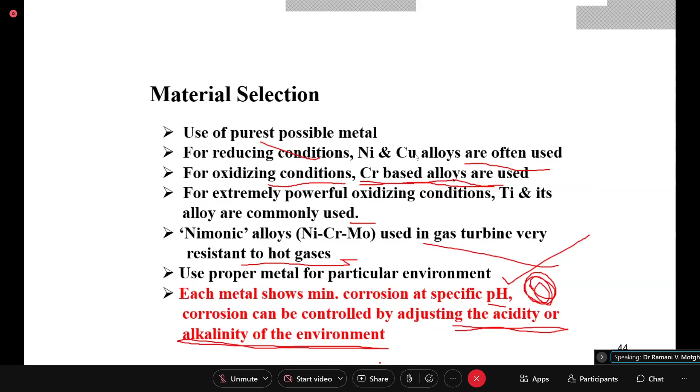Then there are protective coatings. Many coatings are there; one is metallic coating. You know that steel, it is galvanized - galvanization is coating of a zinc layer on the steel metal. Zinc is always a sacrificial material which sacrifices itself. Even if there is a scratch, the zinc part will undergo oxidation, and that is how galvanized sheets are protected from corrosion.

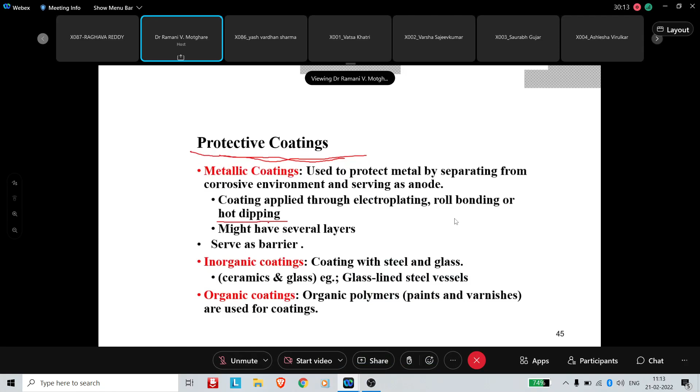Other types of metallic coatings are used to protect metal by separating it from the corrosive environment and serving as anode. Coating is applied through electroplating, roll bonding, or hot dipping. Roll bonding is like laminating, where the metal is placed between two thin sheets of sacrificial material - that is metal cladding. In hot dipping, certain metals which liquefy at a lower temperature are melted, and the metal to be protected is dipped into that hot melt, giving you metal hot dipping.

These coatings might have several layers or serve as barriers. So it may serve as a barrier, or it may have several layers, or it may work by sacrificing itself.

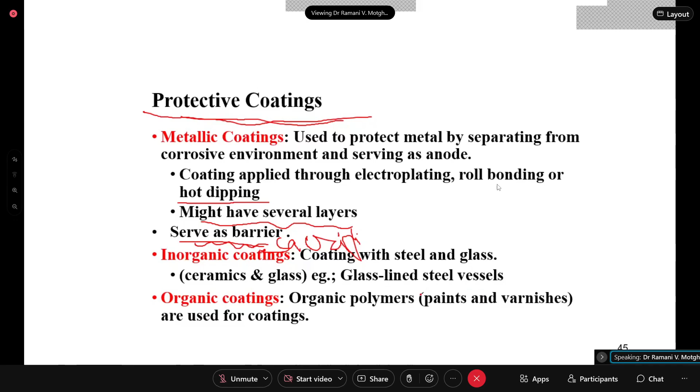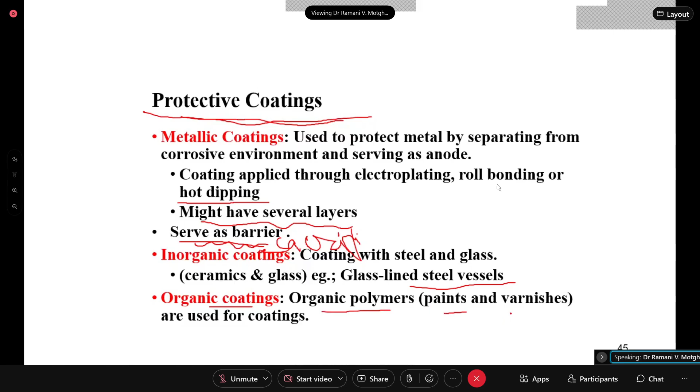So that is how one metal may protect another. Inorganic coatings are ceramic and glass, or glass-lined steel vessels, used in some applications. You can line it with glass and ceramic. Organic coatings are organic polymers like paints and varnishes that are generally used.

Then design, material and design selection. So material we saw. Now coming to design: weld rather than rivet containers to reduce crevice corrosion.

Now you see what is a rivet. When you have two metal plates placed over each other, a rivet is something having a kind of mouth and a smaller part. That part is put here and then hammered from the upper or lower end, so it goes in like this. That is termed as a rivet.

The rivet metal is generally different from the sheet metal, and that is why anodic and cathodic areas may form at the rivets. So instead of rivets, it's suggested that for two sheets you use weld material which fills this gap as well as the gap from the lower side, so the portion becomes gradual. The moment there are no such corners, accumulation of moisture and dust doesn't take place, and corrosion is stopped or reduced.

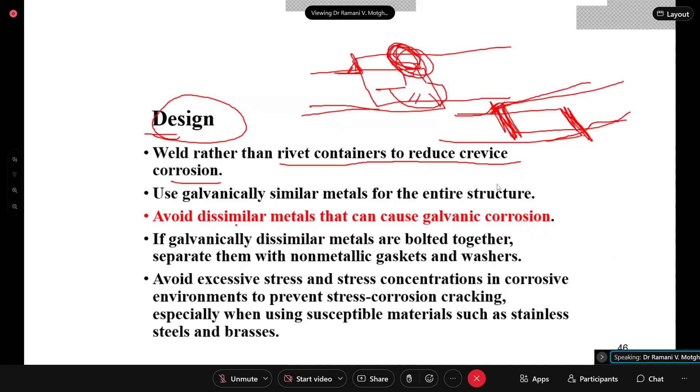So use a galvanically similar metal for the entire structure. A single metal, if used, is always better. Avoid dissimilar metals that can cause galvanic corrosion.

When galvanically dissimilar metals are bolted together, separate them with a non-metallic gasket or washer. So if you are nut-bolting with dissimilar metals, put a washer here. There is a nice diagram in SS Dara's book, you should definitely read that. If you put a washer, it will avoid contact between the two dissimilar metals.

Avoid excessive stress and stress concentration in corrosive environments to prevent stress corrosion cracking, especially when using susceptible materials such as stainless steel and brass.

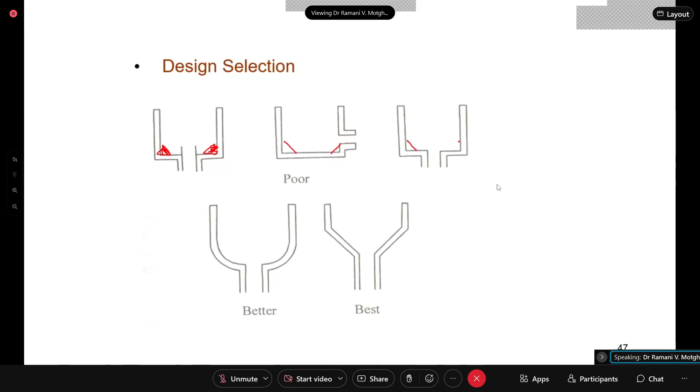So this is the design aspect. If you have such a structure, dust and moisture or water may accumulate at these corners. A structure without corners is always preferred, like this. So this should not be the case, which is why it is termed a poor structure.

Whereas here, if water falls, it will trickle down and not remain stagnant. This is termed a better structure, and this is termed the best one if held horizontal and vertical like this.

Then coming to different types of protection. The first one is design and material selection. The second one is protective coatings, the paints and all we saw, metal coatings and organic coatings. Then the third one is cathodic and anodic protection.

There are two types of cathodic protection. The first type is use of sacrificial anode, where you use a metal more active than the metal to be protected, and the other one is impressed current cathodic protection.

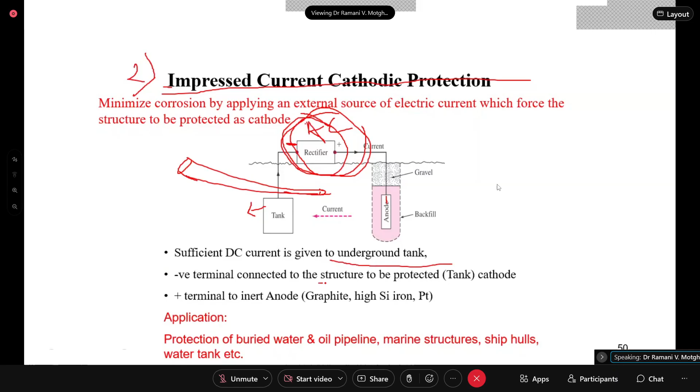So sufficient DC current is given to the underground tank, with the negative terminal connected to the structure to be protected and the positive terminal to an inert anode. The anode is generally inert, like platinum, high silicon iron, or graphite. The applications include protection of buried water and oil pipelines, marine structures, ship hulls, and water tanks.

So what is the difference between sacrificial anode cathodic protection and impressed current cathodic protection? In sacrificial anode cathodic protection, after a few years you have to replace the block of active metal, magnesium or zinc, because it dissolves into the soil. External power supply is not required here, whereas external power supply is required in impressed current protection. Periodic replacement of the sacrificial anode is needed, whereas in impressed current protection there is no replacement required.

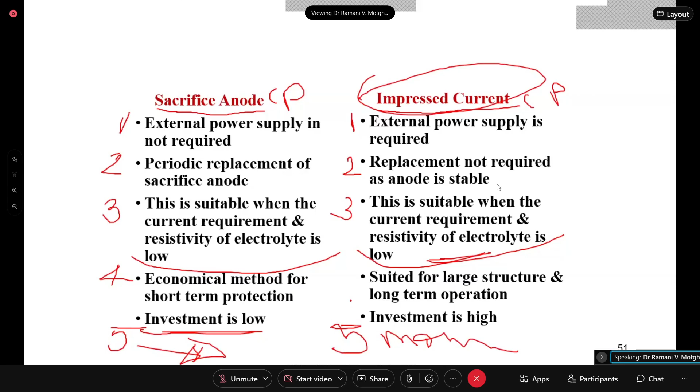Whereas with sacrificial anode protection, once you put it in place, you can forget about it for at least 5-10 years, and after that you simply replace the block of sacrificial metal. So these are some of the differences between the two methods.

Now coming to an important concept: anodic protection. What is anodic protection? You render a metal anodic and still it is protected. How is this possible? The structure to be protected is rendered anodic—you make it behave like an anode and still it is protected. Is it possible?

Sacrificial protection can be done - sacrificial anode cathodic protection we have already seen. We started with the first type, that is cathodic protection, in which we saw sacrificial anode and impressed current cathodic protection. So these are the cathodic protection part.

Now what we are doing? We are rendering the metal tank anodic and still it is protected. So the important part is oxidation will take place. So when you render any metal as anode, oxidation will take place. But the oxidation product forms such a coherent, non-porous film on the metal surface that the surface is protected thoroughly and there is no more corrosion, no matter sulfuric acid is kept there - this part is the oxide film formed.

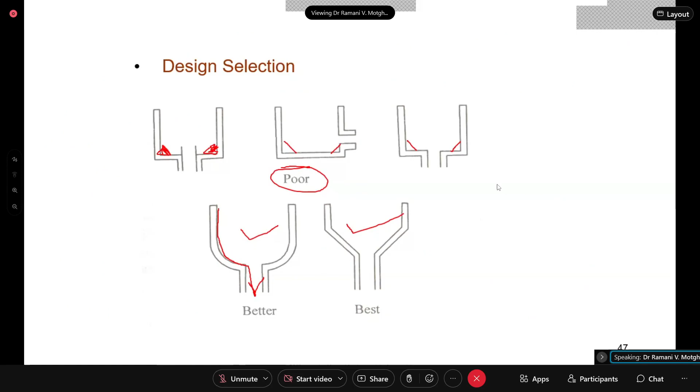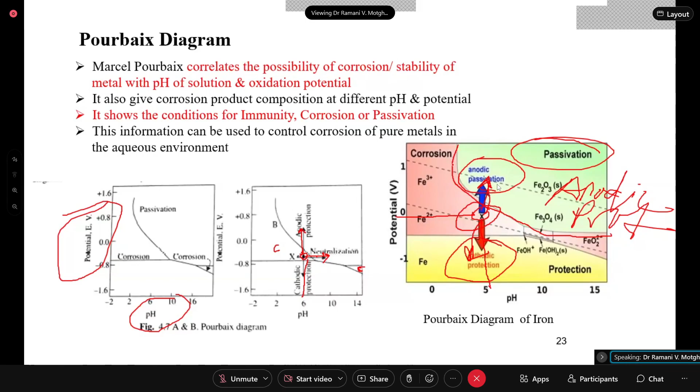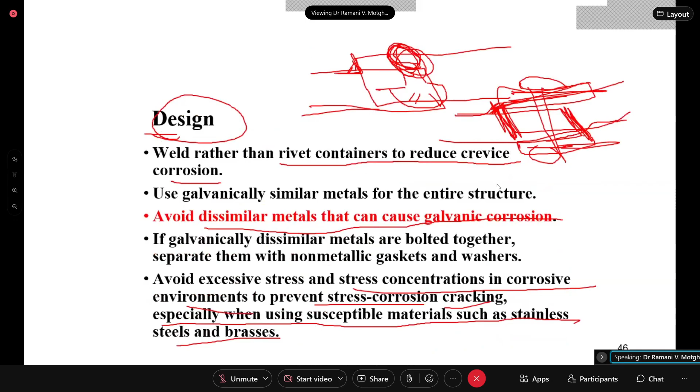So this iron system is studied intensively for such phenomena - what is the potential and effect of pH on iron, and how it shows corrosive behavior, at what potential corrosion takes place - and that concept is used in anodic protection.

So in anodic protection, you use a potentiostat which has three terminals, and this device is connected to the tank to be protected. If controlled anodic current is applied, the metal gets passivated and the rate of metal dissolution decreases. The potentiostat shifts the corrosion potential into passive potential so that corrosion of metal is stopped. It is based on the formation of a protective film on the metal by externally applied anodic current. The potential range depends upon the relationship between the metal and the environment.

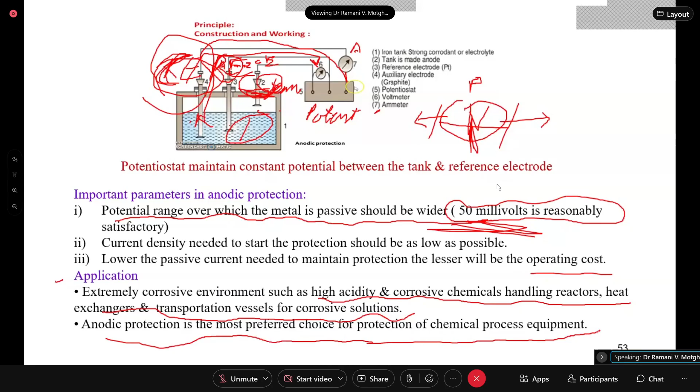Then application: extremely corrosive environments such as high acidity or corrosive chemicals handling, reactors, heat exchangers, and transportation vessels for corrosive solutions may be protected by anodic protection. Then anodic protection is the most preferred choice for the protection of chemical process equipments. Chemical students should keep this in mind.

So, distinguishing features of anodic and cathodic protection: anodic protection is applicable only to those metals which show active passive behavior. Cathodic protection can be applied to all metals. Anodic protection has a very high installation cost, while the installation cost of cathodic protection is low.

A potentiostat is required for anodic protection, which is an electronic gadget. For cathodic protection you need only a sacrificial anode or DC power supply. So you don't need an expensive device like a potentiostat.

Anodic protection directly measures corrosion protection rate, whereas cathodic protection is a complex process and does not indicate corrosion rate. Then coming to cost of corrosion, engineering design is incomplete without knowledge of corrosion, so you have to know the cost of corrosion.

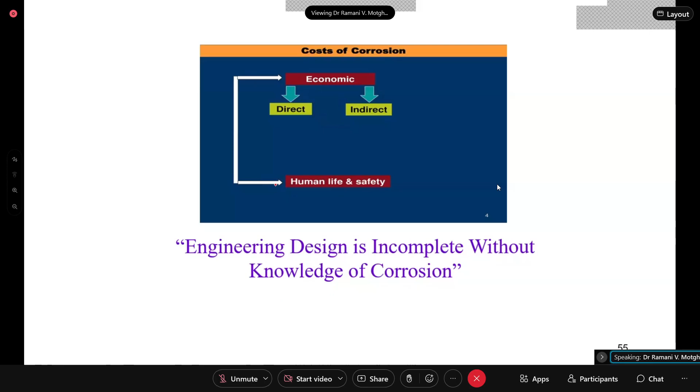Then coming to the next part, this completes your protection. Then coming to fuel cells. Now what are fuel cells? A fuel cell is an electrochemical conversion device.

It produces electricity from fuel. Fuel is oxidized by an oxidant, and there are two compartments, one for the fuel and the other for the oxidant, with an electrolyte in between and two electrodes. So mostly there is no combustion reaction taking place, but due to the electrochemical or chemical reaction taking place, current will flow or electrons will migrate from one electrode to the other, and that is how the fuel cell will work without combustion and production of carbon dioxide.

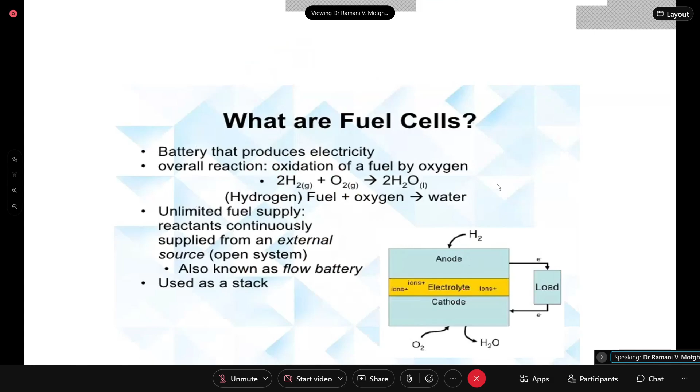So here the reaction that takes place is twice H2 gives formation of 4H plus, and 4 electrons will move from the anode to the cathode. Here will be your load.

Here oxygen is supplied, or air inlet. Oxygen from air may be used, or pure oxygen. Astronauts who carry such hydrogen oxygen fuel cells use oxygen, but here we can study with air also. This oxygen with 4H plus leads to formation of pure water molecule, and this water is used by the astronauts for drinking purpose also.

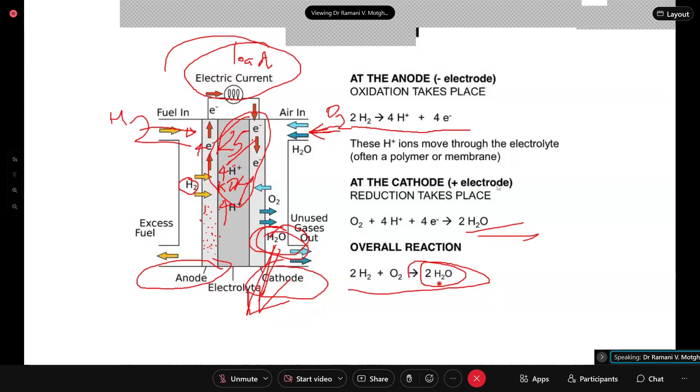Then the electrolyte is 25% KOH, which remains here. So fuel cell systems are environmentally sustainable.

High conversion efficiency is there, around 85%. The PPT is a little incomplete.

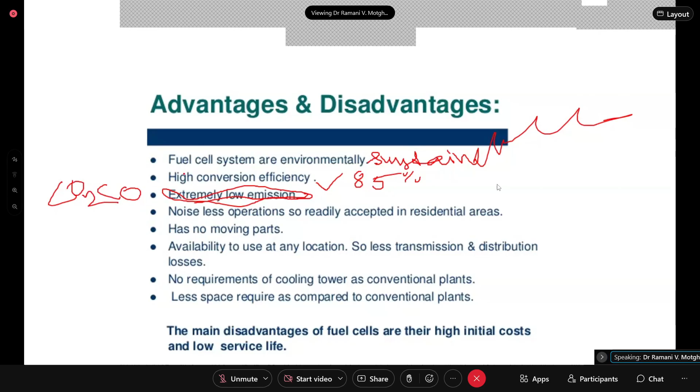Extremely low emission. Extremely low emission means what? There is no emission of carbon dioxide and all. CO or CO2 is totally absent. There is no carbon used in the fuel in a hydrogen oxygen fuel cell.

Noiseless operation, and a standalone power plant has no moving parts. Then availability to use at any location - sizing can be done, so less transmission and distribution losses, no requirement of cooling towers like conventional plants, less space required compared to the conventional plant, standalone power plant, noise-free power plant. The main disadvantages of fuel cells are high initial cost and low service life.

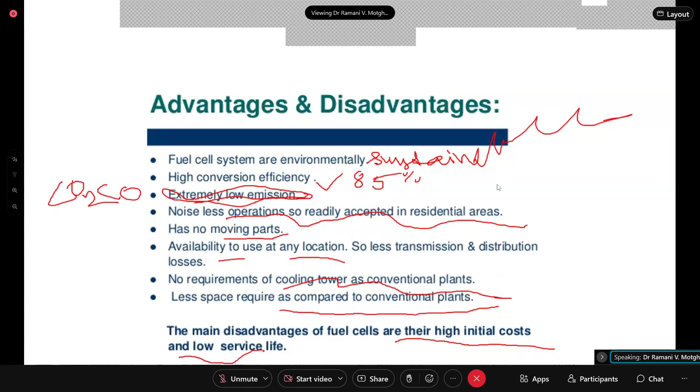Okay, so these are some of the advantages, same as we had discussed. Then some numericals - these numericals are based on the Nernst equation. So the first numerical, can you see the numerical?

Yes ma'am, okay. So this is a numerical. I'll just tell you, you have solved this top one, ma'am - the part is little bit not visible, the topmost part.

Consider the electrochemical cell: Fe2 plus is 0.1 molar concentration, and then you are having cadmium, 0.001 molar cadmium ion concentration. So it's not a concentration cell, but it is an electrode concentration cell, or you can say the electrolyte concentration - the electrolyte concentration is also different.

So you see, you can write the numerical, and such type of numerical may be asked - rather it was asked in some exam, that is why it has been put. So cadmium has an E naught of minus 0.4, whereas iron has an E naught of minus 0.44.

So we expect that this is a greater negative value, so oxidation will take place at a greater negative value. So before we go further, whether oxidation is taking place here, is it really the left-hand electrode acting as anode? We will verify by calculating the E half values for each of them.

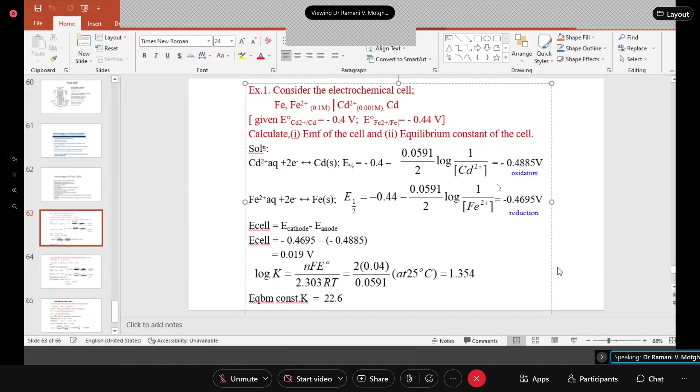Okay, then this is a concentration cell. Now this is an amalgam concentration cell in which the concentration of zinc in mercury is different. C1 is 2 grams of zinc in 100 grams of mercury, and C2 is 1 gram of zinc in 100 grams of mercury. In between, consider that it is a zinc sulfate solution or zinc chloride solution, with Zn2+ aqueous.

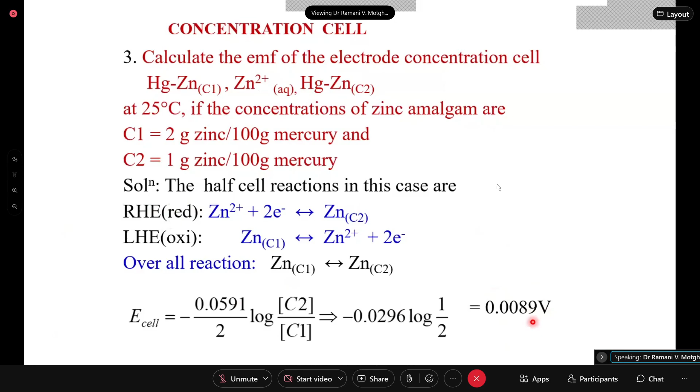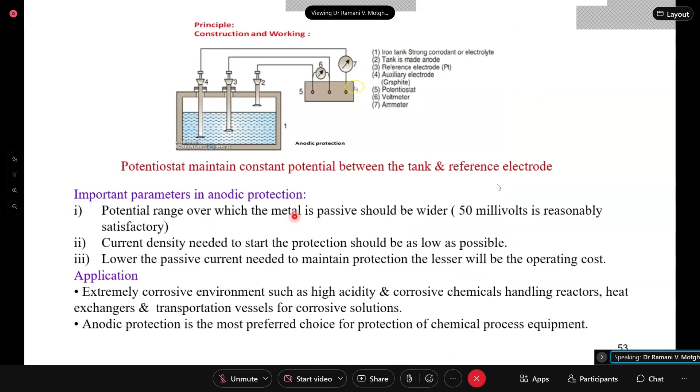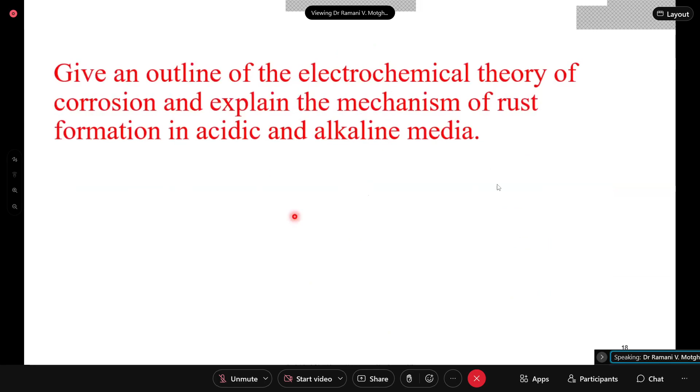Clear? Okay, so this much is there in the corrosion chapter, and the book PDF of corrosion has been shared with you on the WhatsApp group. Things are clear? So you should read from the PPT as well, the PPT is sufficient. If you don't get certain things in the PPT, you can go through the book PDF.